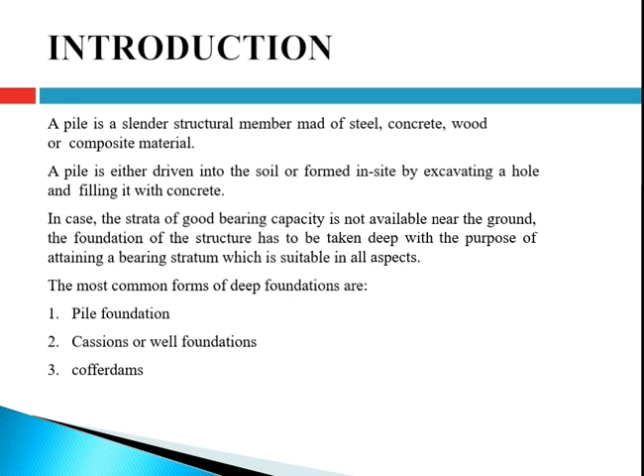with the concrete. In case a stratum of good bearing capacity is not available near the ground, the foundation of the structure has to be taken deep with the purpose of attaining a bearing stratum which is suitable in all aspects. The most common forms of deep foundations are pile foundation, caisson or well foundations, and cofferdams.

Next is uses of pile foundation. The load of the superstructure is heavy and its distribution is uneven. The topsoil has poor bearing capacity. The subsoil water is high so that pumping of water from the open trenches for the shallow foundation is difficult and uneconomical. There is large fluctuation in subsoil water level, where timbering to the trenches is difficult and costly.

The structure is situated on the seashore or riverbed, where there is danger of scouring action of water. Canal or deep drainage line exists near the foundation. The topsoil is of expansive nature. Piles are used for the foundation of transmission towers and offshore platforms, which are subjected to uplift forces.

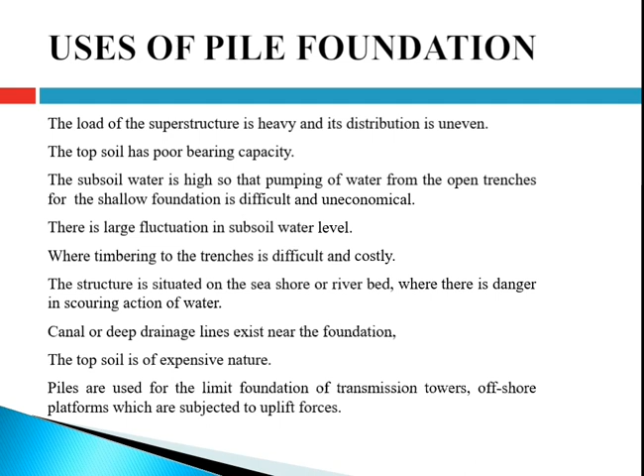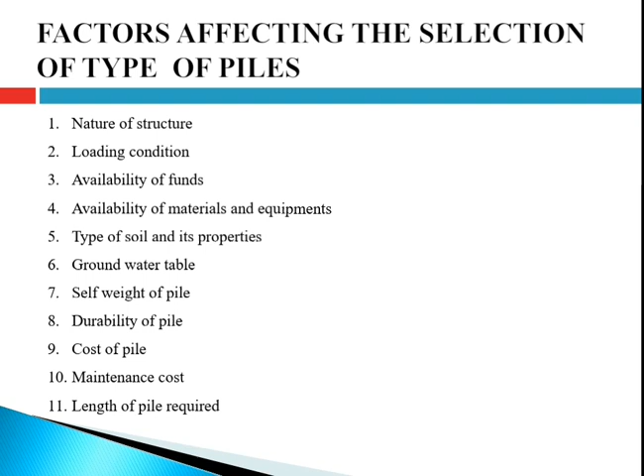Next is factors affecting the selection of type of piles. Nature of structure, loading condition, availability of funds, availability of material and equipment, type of soil and its properties, groundwater table, self weight of pile, durability of pile, cost of pile, maintenance cost, length of pile required, number of piles required, case study of adjacent building, facilities available for pile driving, difficulties in pile driving, adaptability to

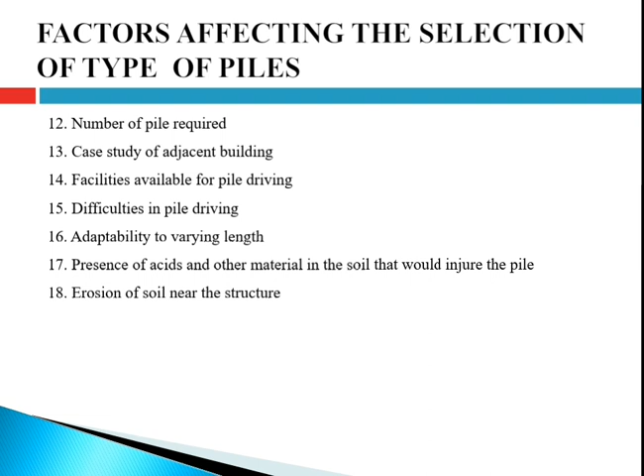varying length, presence of acids and other material in the soil that will injure the pile, and erosion of soil near the structure. So now we will discuss it in depth. First one is nature of structure. For structures on land, the driven and cast in place piles are usually the cheapest for moderate loadings and unhampered site conditions. For the foundation of wharf structures and jetties on the seashore, the driven piles or driven and cast in place piles are preferred.

In case piling is to be done very near to some existing structure, open-ended tube piles or H-piles may work out to be a good choice. Piles used to support marine structures or structures above open water should be precast type. The jacked piles are suitable for underpinning existing structures. For heavy structures, large diameter bored piles are the most economical type.

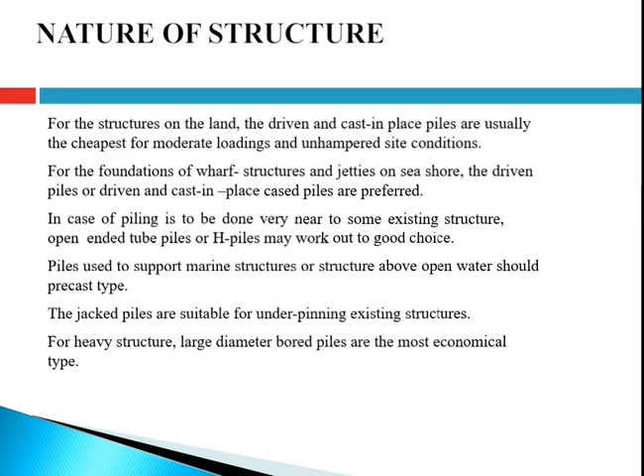Next one is ground condition. If the subsoil consists of silt or alluvium of appreciable depth, the pile will act as a friction pile. In case the ground is very weak or loose and it is intended to use cast in situ piles, casing will be required to prevent the inflow of soil into the pile hole. In adverse conditions where the groundwater flow is strong, piles with permanent casing should be used. Alternatively, precast piles may be used.

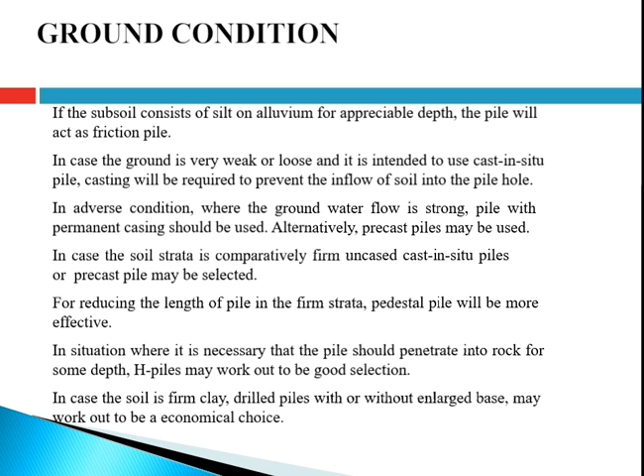In case the soil strata is comparatively firm, uncased cast in situ piles or precast piles may be selected. For reducing the length of the pile in the firm strata, pedestal piles will be more effective. In situations where it is necessary that the pile should penetrate into the rock for some depth, H piles may work out to be a good selection. In case the soil is firm clay, drilled piles with or without enlarged base may work out to be an economical choice.

Next one is durability. In situations where there is a possibility of the soil being chemically aggressive, high quality precast concrete piles should be selected. Timber piles may work out to be economical if they are used for the foundation of timber trestle structures with moderate load or if the piles are to be used for protecting concrete docks, etc. Timber piles are not suitable for marine conditions as they are likely to be affected by borers or insects.

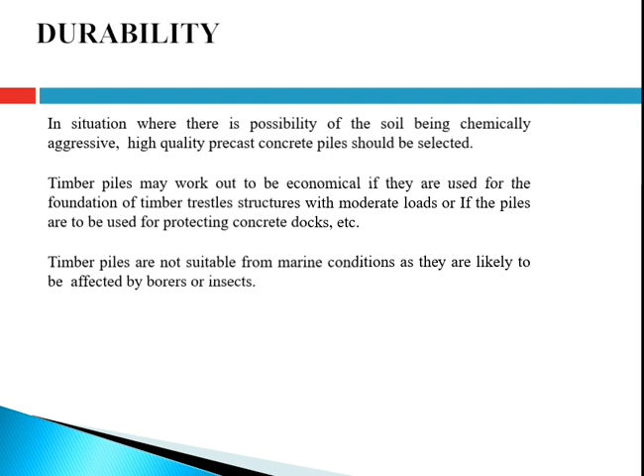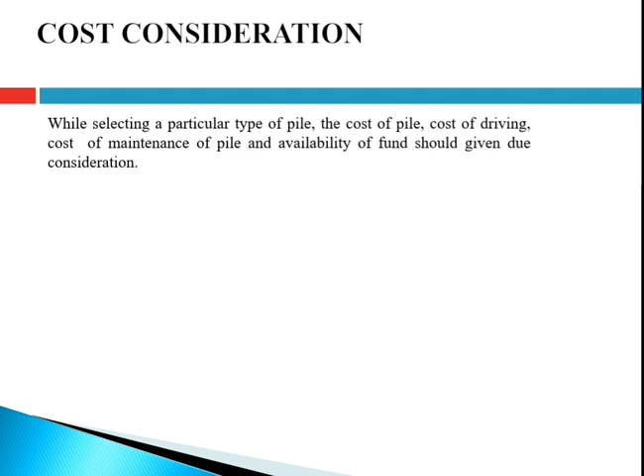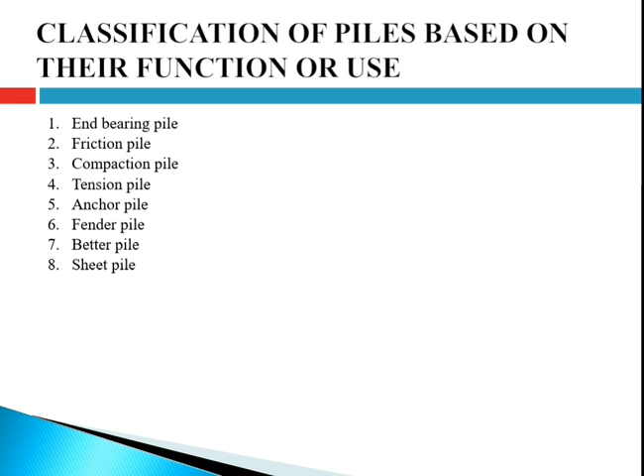Next is cost consideration. While selecting a particular type of pile, the cost of pile, cost of driving, cost of maintenance of pile and availability of funds should be given due consideration. Next is classification of piles based on their function or use, which are end-bearing pile, friction pile, compaction pile, tension pile, anchor pile, fender pile, batter pile and sheet pile.

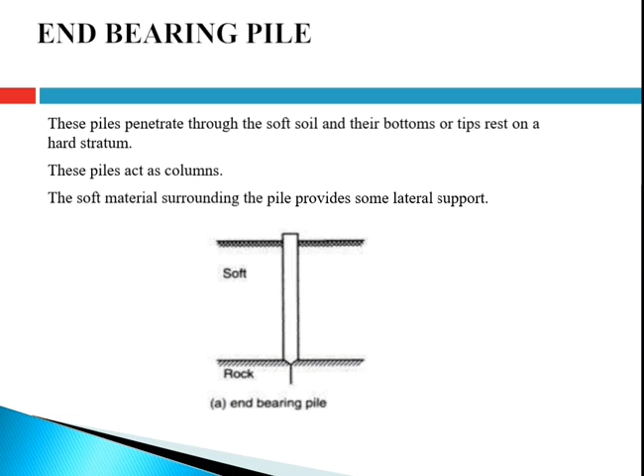Next one is friction pile, which you can see in the image. When loose soil extends to a great depth, piles are driven up to such a depth that frictional resistance developed at the sides of the piles equals the load coming on the piles. Friction piles are used when a hard stratum is available at greater depth.

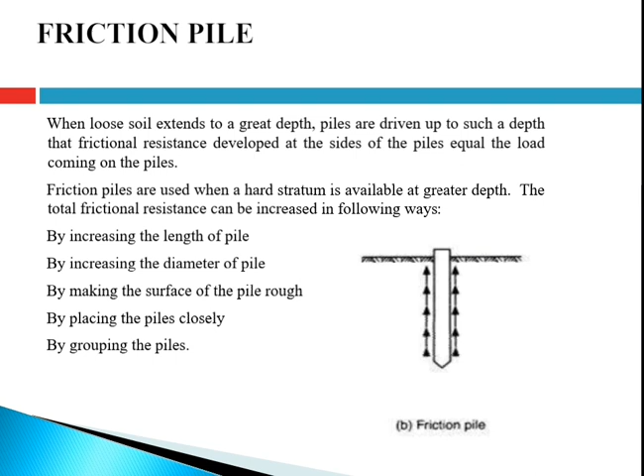The total frictional resistance can be increased in the following ways: by increasing the length of pile, by increasing the diameter of pile, by making the surface of the pile rough, by placing the piles closely, by grouping the piles.

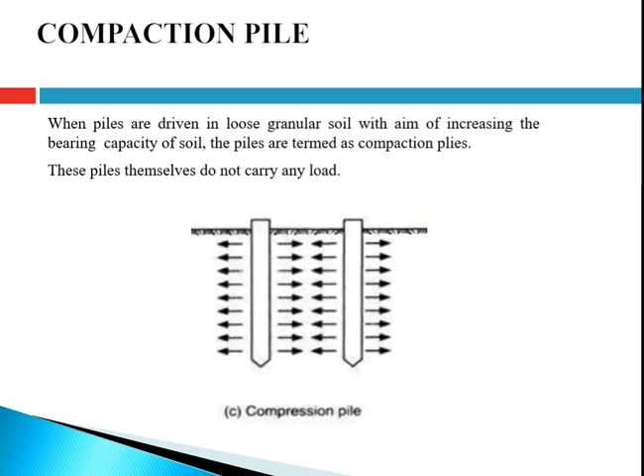Next one is compaction pile, which you can see in the image. When piles are driven in loose granular soil with the aim of increasing the bearing capacity of soil, the piles are termed as compaction piles. These piles themselves do not carry any load.

Next is tension pile. You can see it in the image where turning force and frictional force is shown. These piles anchor down the structure subjected to uplift due to hydrostatic pressure or due to overturning moment. It is also called uplift pile.

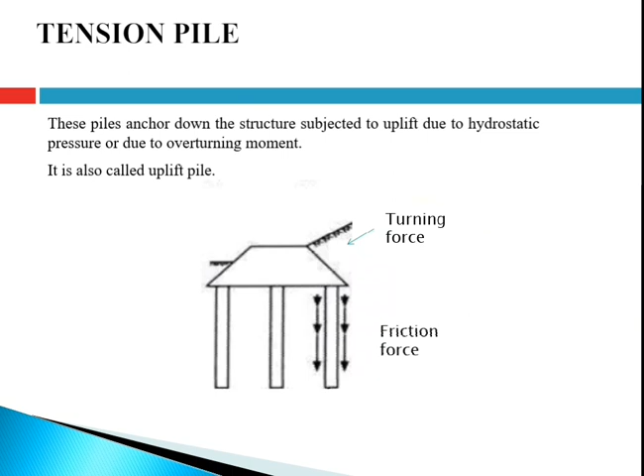Next one is anchor pile, fender pile, batter pile and sheet pile, which you can see in the image. All the piles are shown. So moving towards it, anchor piles provide anchorage against the horizontal pull from sheet piling or other pulling force. Fender piles are used to protect waterfront structures against impact from ships or other floating objects.

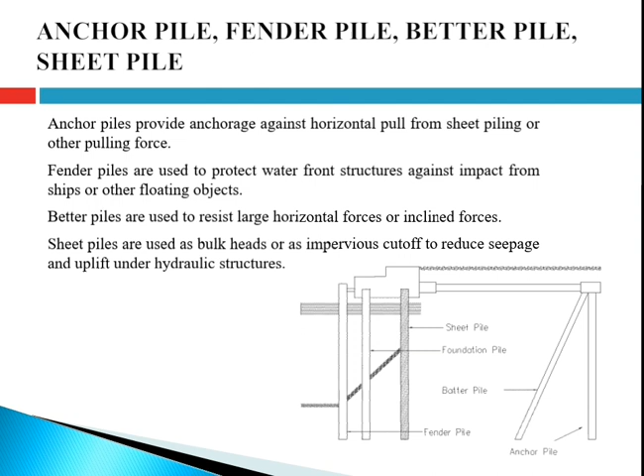Batter piles are used to resist large horizontal forces or inclined forces. Sheet piles are used as bulkheads or as impervious cutoff to reduce seepage and uplift under hydraulic structures.

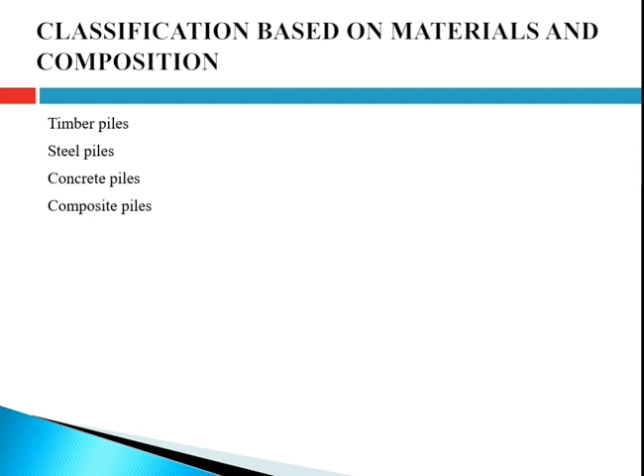Next, classification based on materials and composition, which are mainly timber piles, steel piles, concrete piles and composite piles. So here you can see timber pile in the image. So moving forward to it, timber piles are made of tree trunks driven with the small end as a point. They may be circular or square.

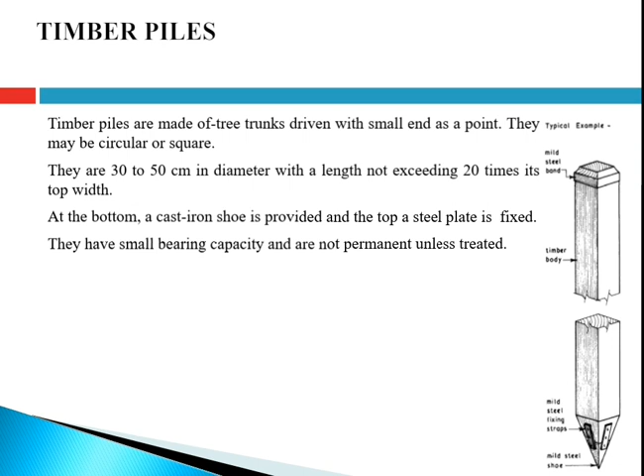They are 30 to 50 cm in diameter with a length not exceeding 20 times its top width. At the bottom, a cast iron shoe is provided and atop a steel plate is fixed. They have small bearing capacity and are not permanent unless treated.

Next, timber pile advantages. Economical where timber is easily available, can be driven rapidly and as such saves time. Because of elasticity, timber piles are recommended for sites subjected to unusual lateral forces, for example, a ship or ferry terminal. They do not need heavy machinery and elaborate technical supervision. Being light, they can be easily handled. They can be easily withdrawn if needed.

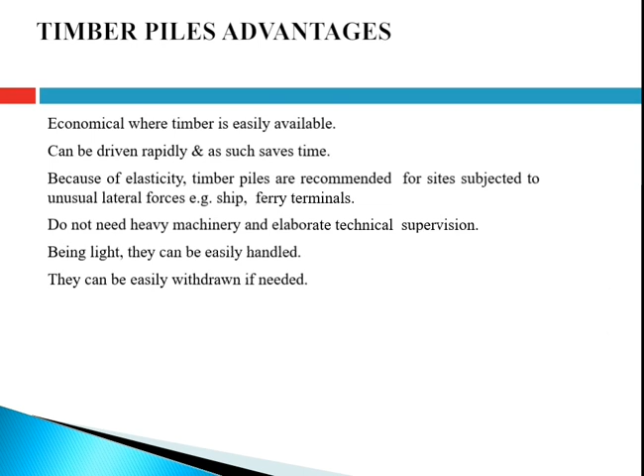Next, disadvantages. These piles cannot take heavy load and are unsuitable for use as end-bearing piles, liable to decay or deteriorate by salt water or insects. Restricted length, and it is rather difficult to procure piles in required size and length. It is difficult or rather impossible to drive these piles into the hard stratum.

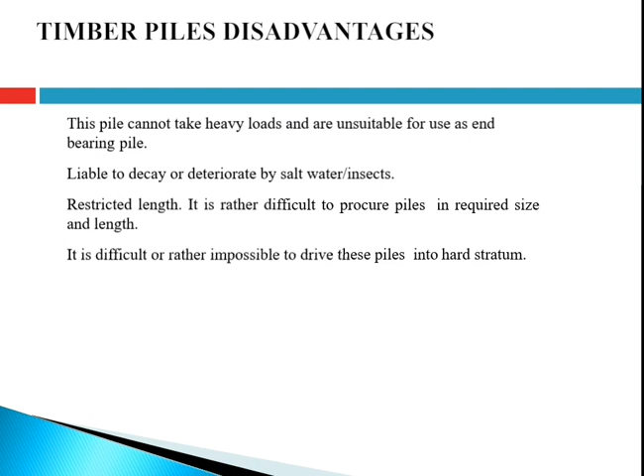So next one is steel piles. You can see rolled steel piles and H steel pile in the image. So moving towards it, steel piles are usually of rolled H section or thick pipe section. These piles are used to withstand large impact stresses and where less disturbance from driving is desired. Steel sheet piles and H piles are generally used to support the open excavation and to provide seepage barrier.

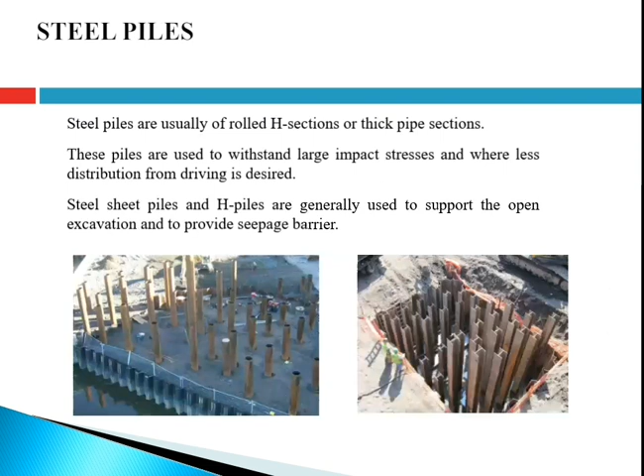Next one is concrete pile. You can see it in the image. Concrete piles are either precast or cast in situ. Precast piles are cast and cured at the casting site and then transported to the site for installation. These piles are adequately reinforced to withstand handling stresses along with working stresses. Precast piles are normally suitable for short lengths.

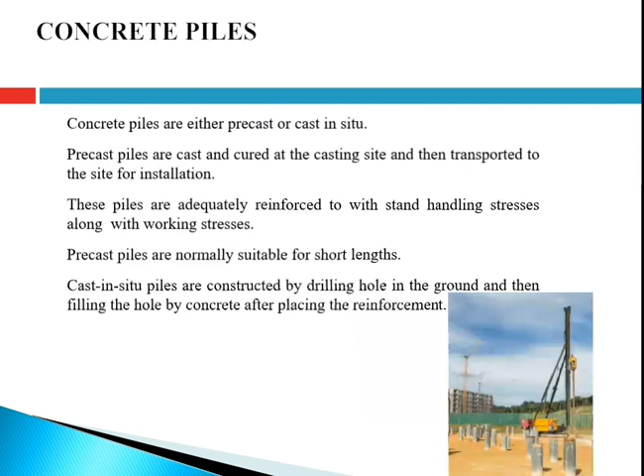So precast piles are those which are manufactured in a factory or at a place away from the construction site and then driven into the ground at the place required. These piles require heavy pile driving machinery. Precast piles may be square, octagonal or circular in cross section and may be tapered or parallel sided longitudinally.

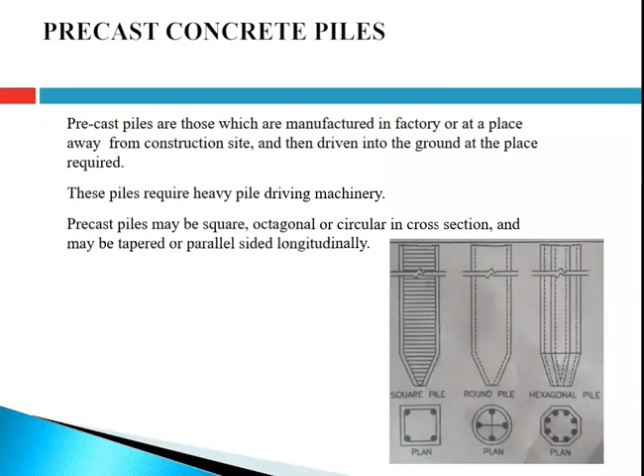The size of pile may vary from 30 cm to 50 cm in cross sectional dimension and up to 20 m or more in length. The reinforcement may consist of longitudinal steel bars of 20 mm to 40 mm in diameter, 4 to 8 nos, with ties of 6 to 10 mm diameter at 100 mm center to center spacing for the top and bottom 1 m length and 300 mm center to center spacing for the middle length. A concrete cover of at least 50 mm is provided and the grade of concrete should be M20.

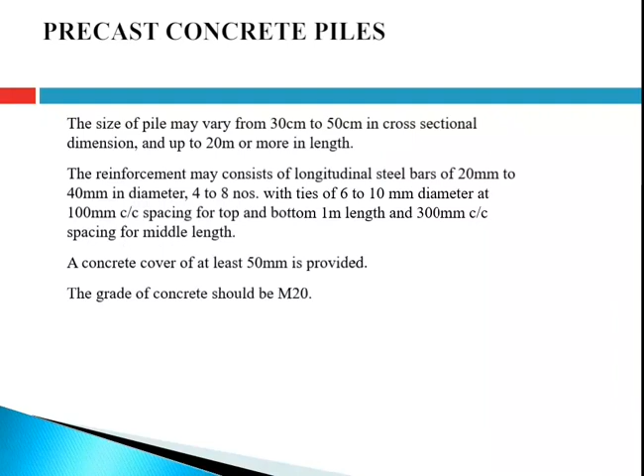Next one is the procedure for forming precast concrete piles. The formwork for the piles is prepared and it is coated with soap solution or oil to prevent adhesion. The cage of reinforcement is prepared as per design, and this cage is then placed in the formwork. A concrete cover of at least 50 mm is provided.

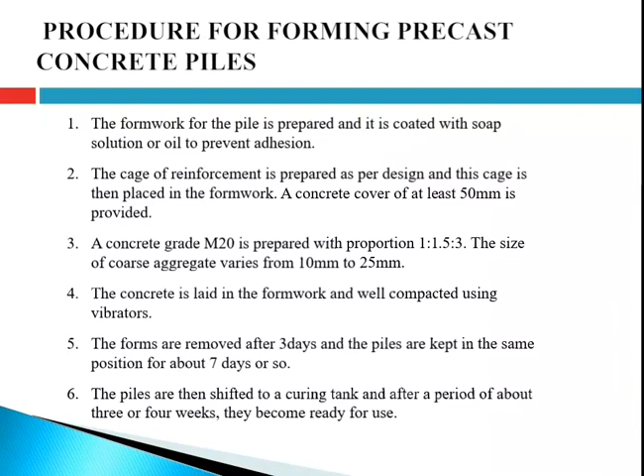A concrete of grade M20 is prepared with proportion 1:1.5:3. The size of coarse aggregate varies from 10 mm to 25 mm. The concrete is laid in the formwork and well compacted using vibrators. The forms are removed after 3 days and the piles are kept in the same position for about 7 days or so. The piles are then shifted to a curing tank and after a period of about 3 or 4 weeks they become ready for use.

Next, advantages of precast concrete piles. They can be cast well before the commencement of the work, resulting in rapid execution of work. The position of reinforcement in the pile is not disturbed from its original position. They can be driven under water. The piles can be loaded soon after they have been driven to a desired depth. Any number of piles can be manufactured at a convenient place and this may prove to be economical. These piles are highly resistant to biological and chemical action of the subsoil.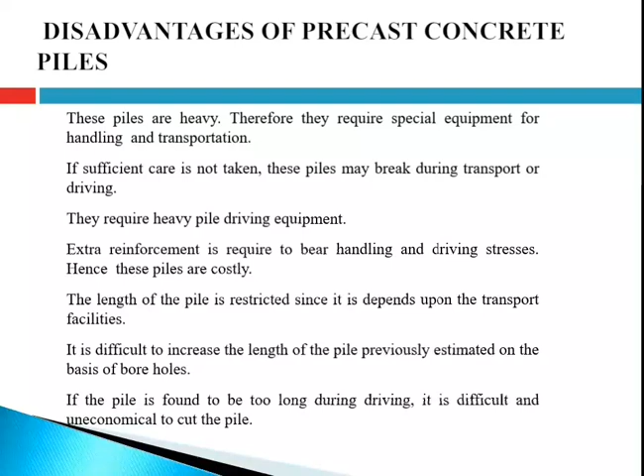The length of the pile is restricted since it is dependent upon the transportation facility. It is difficult to increase the length of the pile previously estimated on the basis of boreholes. If the pile is found to be too long during driving, it is difficult and uneconomical to cut the pile.

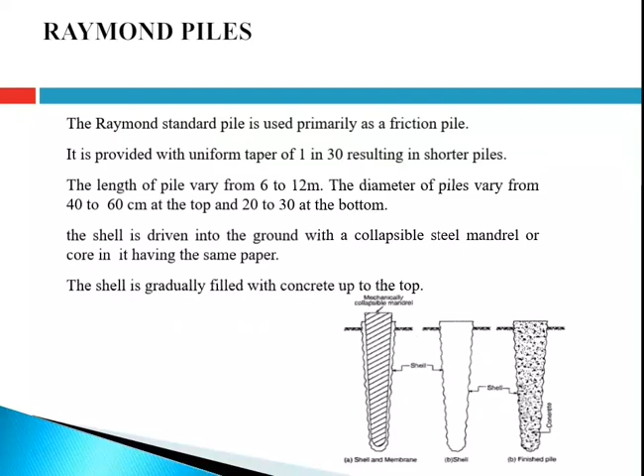Next one is Raymond piles. The Raymond standard pile is used primarily as a frictional pile. It is provided with a uniform taper of 1:30, resulting in shorter piles. The length of piles varies from 6 to 12 meters. The diameter of piles varies from 40 to 60 cm at the top and 20 to 30 cm at the bottom. The shell is driven into the ground with a collapsible steel mandrel or core in it having the same taper. The shell is gradually filled with concrete up to the top. So here you can see the whole process in the image.

Next one is MacArthur piles. MacArthur is a pile of uniform diameter using a corrugated steel shell which remains in place as in Raymond piles. A heavy steel casing with a core is driven into the ground. When the desired depth is reached, the core is withdrawn and a corrugated steel shell is placed in the casing. Concrete is placed in the shell by gradually compacting it and withdrawing the steel casing. So here you can see all the stages in the image.

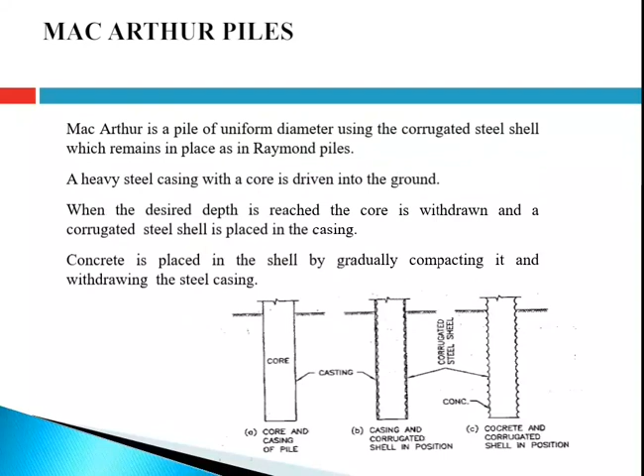Next, BSP base driven piles. You can see it in the image. This pile consists of a helically welded shell of steel plate. A concrete plug is provided at the bottom of the shell. Driving is done by allowing the pile hammer to fall on the concrete plug. The casing is driven to the desired depth and then it is filled with concrete.

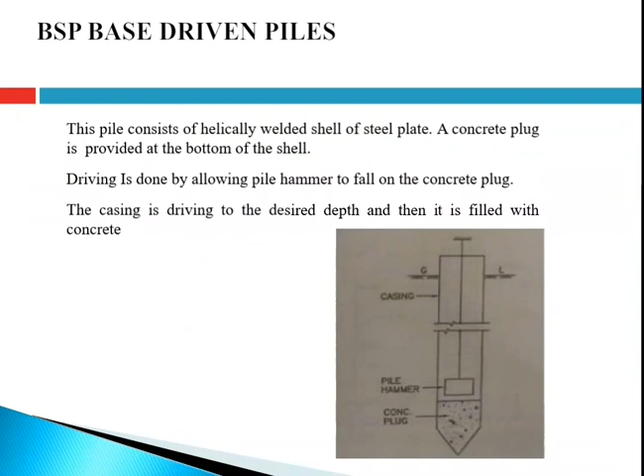Next is swage piles. Swage piles are used with advantage in some soils where the driving is very hard or where it is desired to leave a watertight shell for some time before filling the concrete. In the first stage, a steel shell is placed on the precast concrete plug and a steel core which is not long enough to reach the plug is inserted. In the second stage, the pipe is driven over the plug until the core reaches the plug. The pipe is swaged out by the taper of the plug, thus forming a watertight joint.

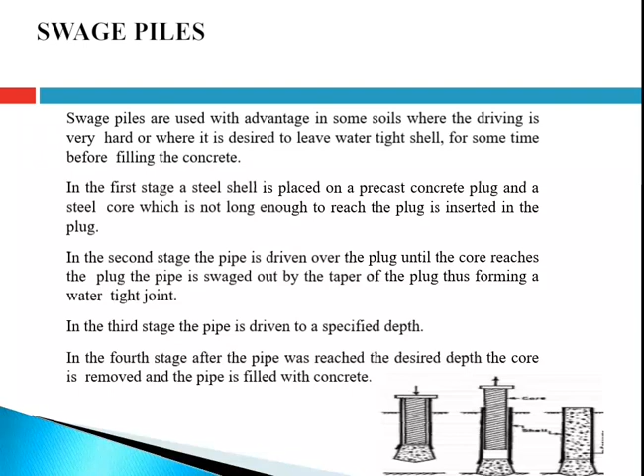In the third stage, the pipe is driven to a specified depth. In the fourth stage, after the pipe has reached the desired depth, the core is removed and the pipe is filled with concrete.

Next one is button bottom piles. These piles are used in locations where an increase in the end bearing area is desired. The piles use a concrete plug in the shape of a button. These piles have been used up to lengths of about 23 meters and for loads up to 50 tons. In the first stage, a steel pipe with a 12 mm thick wall is set on the concrete button. The concrete button has a diameter about 25 mm larger than the pipe.

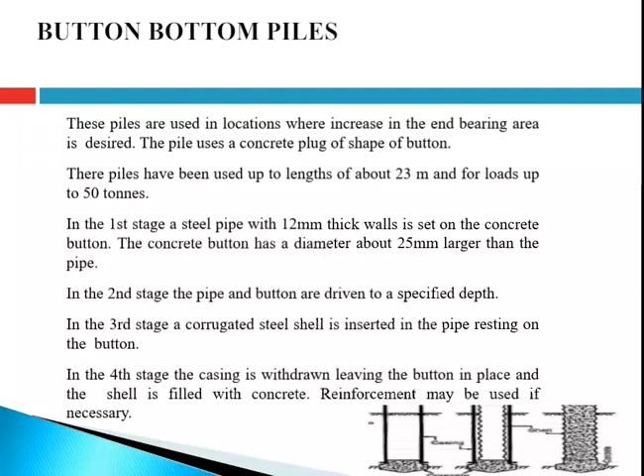In the second stage, the pipe and button are driven to a specified depth. In the third stage, a corrugated steel shell is inserted in the pipe resting on the button. In the fourth stage, the casing is withdrawn, leaving the button in place, and the shell is filled with concrete, and reinforcement may be used if necessary.

Next, uncased cast in situ concrete piles. Advantages and disadvantages. So moving towards the advantages, these piles are cheap as no casing will be left in the ground. Special handling equipment is not required. Concrete is not liable to damage from driving. Cutting of excess length is not required. Storage space not required. Disadvantages are: great skill is required.

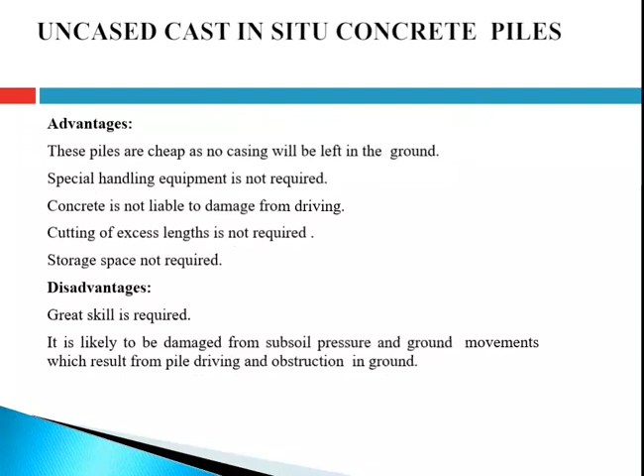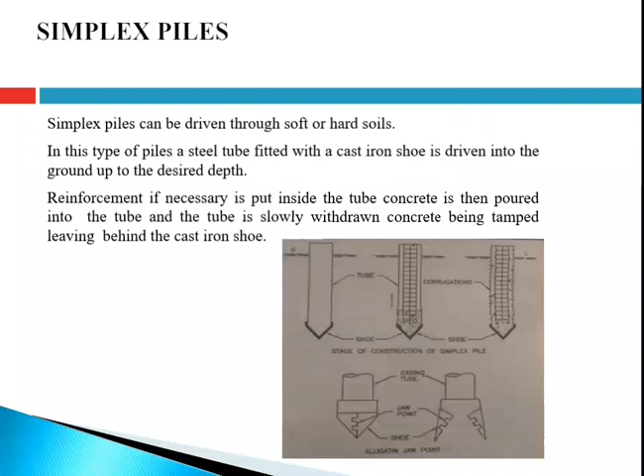In this type of piles, a steel tube fitted with a cast iron shoe is driven into the ground up to the desired depth. Reinforcement, if necessary, is put inside the tube. Concrete is then poured into the tube and the tube is slowly withdrawn, concrete being tamped, leaving behind the cast iron shoe.

In the next stage, the shaft is formed by introducing successive charges of concrete, ramming each in turn and withdrawing the casing gradually about 300 mm at a time. The pile diameter in Franki piles may vary from 50 cm to 60 cm, while the enlarged base may have a diameter of about 90 cm. The pile has a load carrying capacity of 60 to 90 tons.

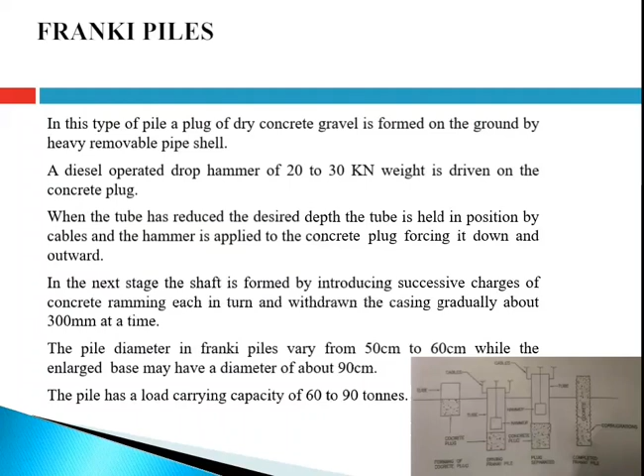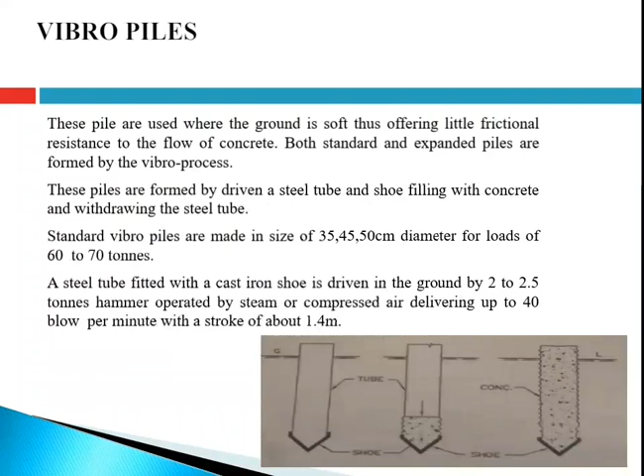Standard vibro piles are made in size of 35, 45 and 50 cm diameter for loads of 60 to 70 tons. A steel tube fitted with the cast iron shoe is driven into the ground by 2 to 2.5 tons hammer operated by steam or compressed air, delivering up to 40 blows per minute with a stroke of about 1.4 meter.

This core is again placed in the casing to rest on the poured concrete. Pressure is applied on the concrete through the core, and at the same time the casing is withdrawn. The process is repeated till the casing is completely removed.

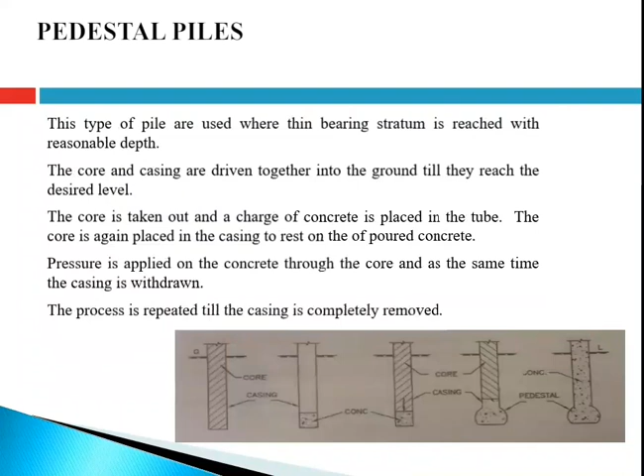When the tube reaches the required depth, the boring tool is withdrawn. In the second stage, a layer of concrete is laid and pressure cap is provided at the top of the tube. The process is repeated till the pile is completed.

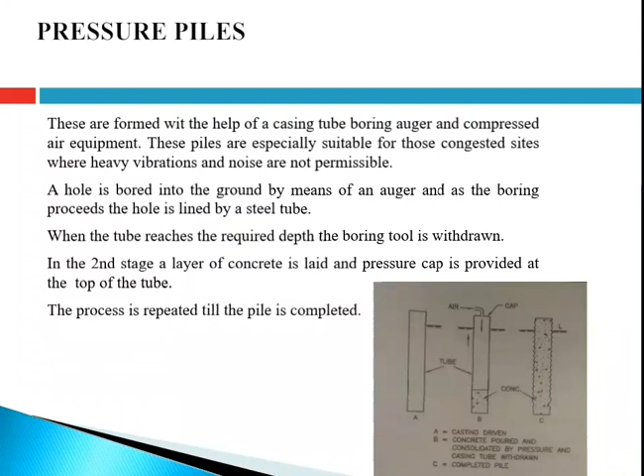Next one is under-reamed piles. These piles are developed by CBRI Roorkee in UP for serving as a foundation for black cotton soil, filled up ground and other types of soil having poor bearing capacity. An under-reamed pile is a bored cast in situ concrete pile having one or more bulbs or under-reams in its lower portion. The bulbs or under-reams are formed by under-reaming tool.

The diameter of the under-reamed piles varies from 20 cm to 50 cm, and that of bulb varies from 2 to 3 times the diameter of pile. The length of under-reamed piles is about 3 meter to 8 meter. The spacing of pile may vary from 2 meter to 4 meter. The under-reamed piles can also be used for sandy soil with high water table.

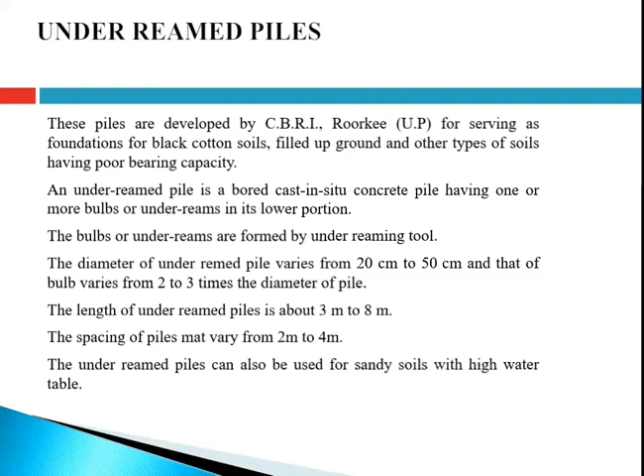The load carrying capacity of under-reamed piles can be increased by adopting piles of larger diameter, or by extending the length of the piles, or by making more bulbs at the base. A single under-reamed pile has only one bulb at the bottom. When two or more bulbs are provided at the base, it is known as multi-bulb under-reamed pile.

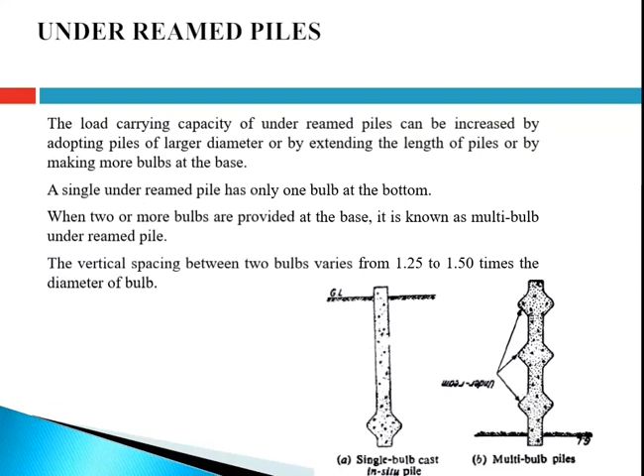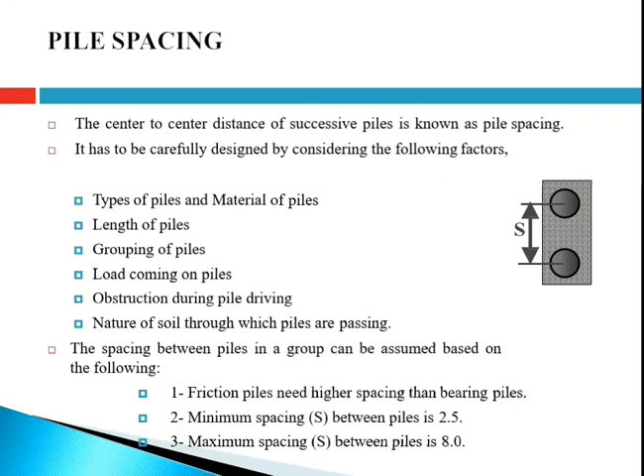First, frictional piles need higher spacing than bearing piles. Second, minimum spacing between piles is 2.5 and maximum spacing between piles is 8.0. So here you can see different arrangements of piles according to pile spacing and the number of piles. 2 to 7 pile spacings are shown in the image.

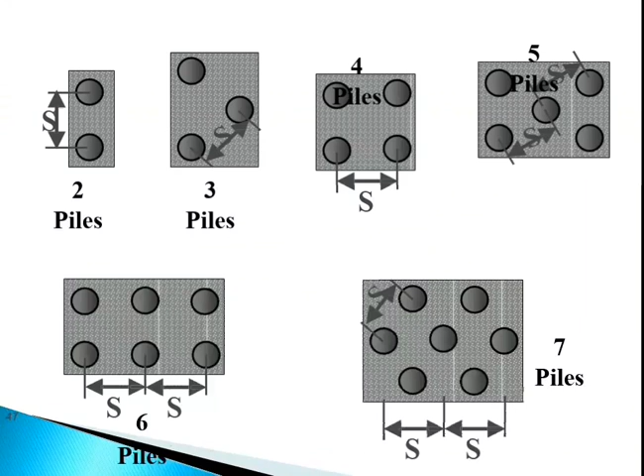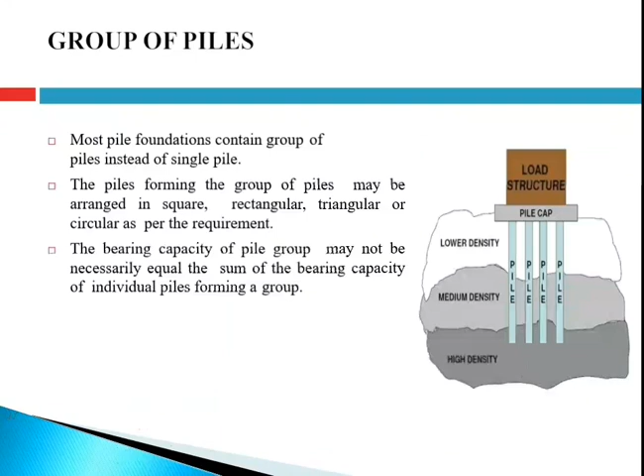Next, group of piles. Most pile foundations contain a group of piles instead of a single pile. The piles forming the group may be arranged in square, rectangular, triangular or circular patterns as per the requirement. The bearing capacity of a pile group may not necessarily equal the sum of the bearing capacities of the individual piles forming the group, which you can see in the image.

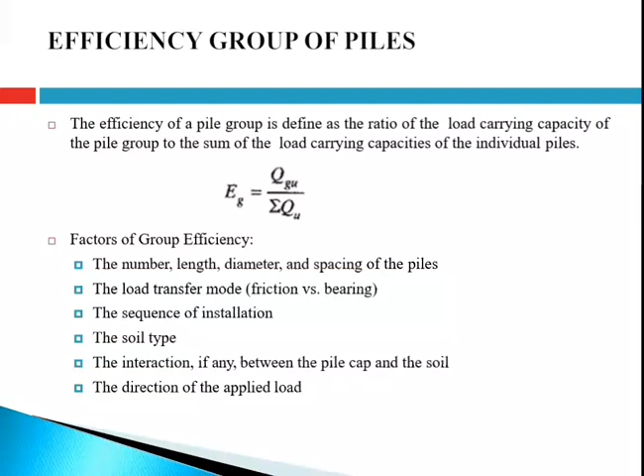Next, efficiency of group of piles. The efficiency of a pile group is defined as the ratio of the load carrying capacity of the pile group to the sum of the load carrying capacities of the individual piles, which is given by E_G = Q_GU / ΣQ_U. Factors of group efficiency: the number, length, diameter and spacing of the piles, the load transfer mode, whether it is frictional versus bearing, the sequence of installation, the soil type, the interaction if any between the pile cap and the soil, and the direction of the applied load.

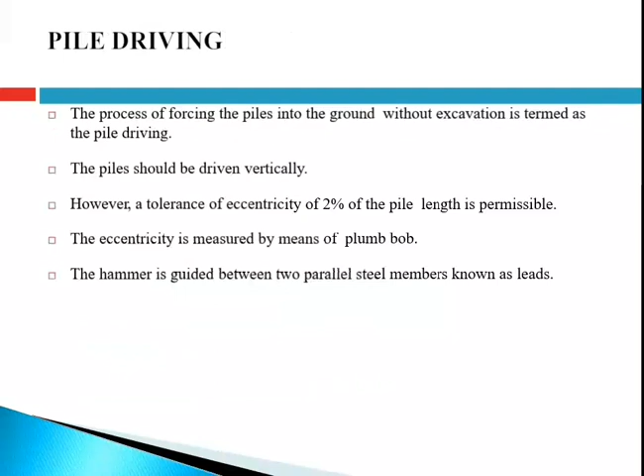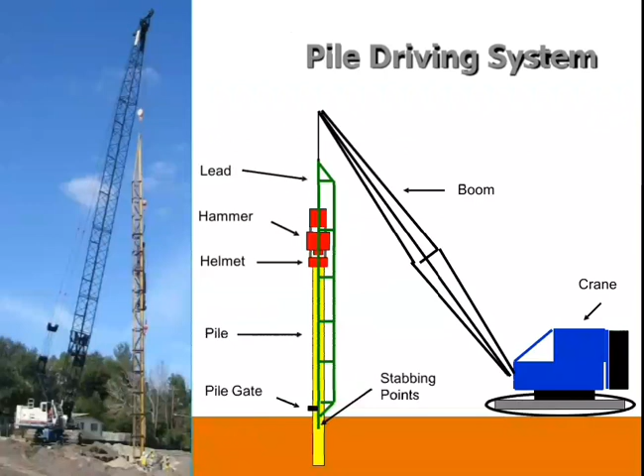Next one is pile driving. The process of forcing the pile into the ground without excavation is termed pile driving. The pile should be driven vertically. However, a tolerance of eccentricity of 2% of the pile length is permissible. The eccentricity is measured by means of a plumb bob. The hammer is guided between two parallel steel members known as leads. So here you can see a pile driving system schematic diagram and also a real life image of it with all the components.

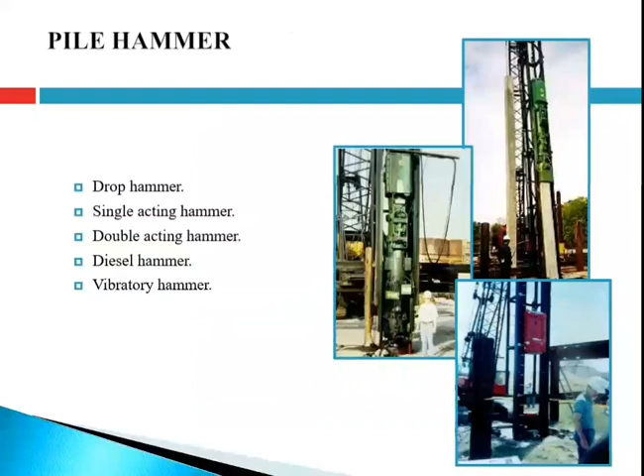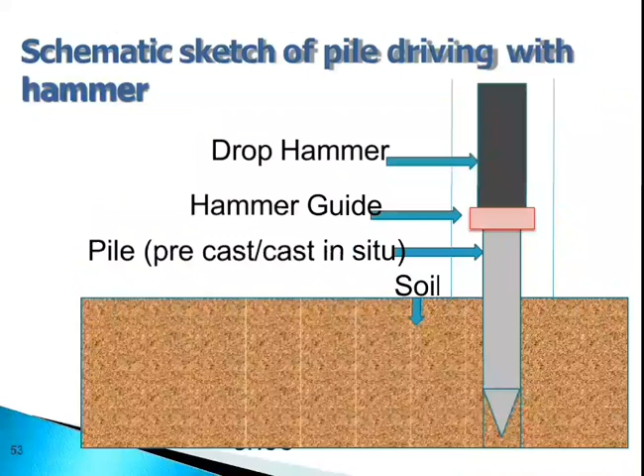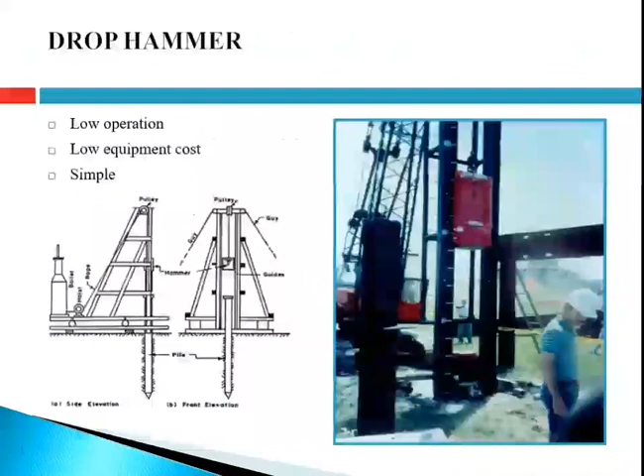Next, drop hammer. They have low operation and equipment cost and are simple in construction. You can see it in the diagram and real life image. A hammer, also known as a ram or monkey, is raised by a winch and allowed to fall or drop by gravity on the top of the pile. The drop hammer is provided with lugs so that it can slide in the leads. A lifting eye or hook is provided to tie it with the rope.

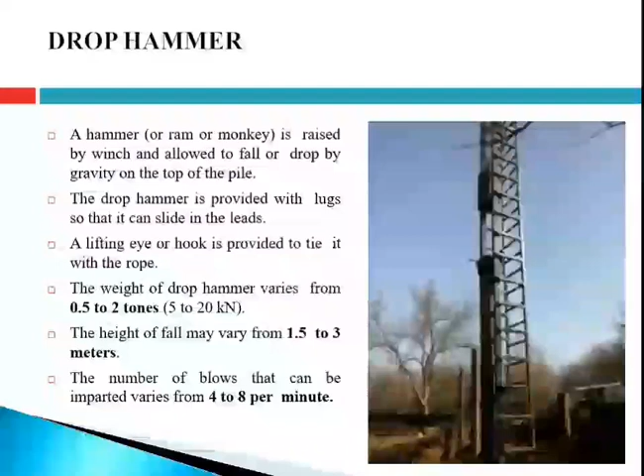The weight of a drop hammer varies from 0.5 to 2 tons. The height of fall may vary from 1.5 to 3 meters. The number of blows that can be imparted varies from 4 to 8 per minute. You can see the drop hammer in the image.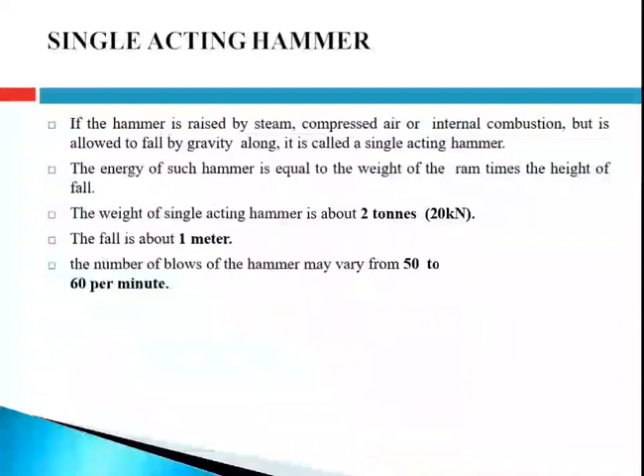Next one is single acting hammer. If the hammer is raised by steam, compressed air or internal combustion, but it is allowed to fall by gravity alone, it is called a single acting hammer. The energy of such a hammer is equal to the weight of the ram times the height of fall. The weight of a single acting hammer is about 2 tons. The fall is about 1 meter. The number of blows may vary from 50 to 60 per minute. So here you can see a schematic diagram and real life image of a single acting hammer.

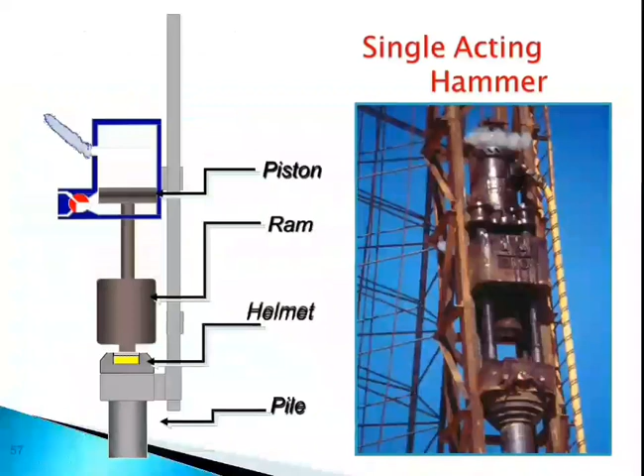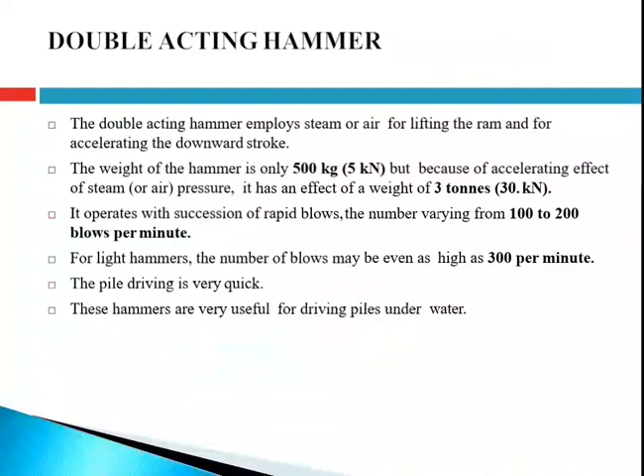Next one is double acting hammer. The double acting hammer employs steam or air for lifting the ram and for accelerating the downward stroke. The weight of the hammer is only 500 kg, but because of the accelerating effect of steam or air pressure, it has the effect of a weight of 3 tons. It operates in rapid succession, the number varying from 100 to 200 blows per minute. For light hammers, the number of blows may be as high as 300 per minute. The pile driving is very quick. These hammers are very useful for driving piles under water. So here you can see the double acting hammer.

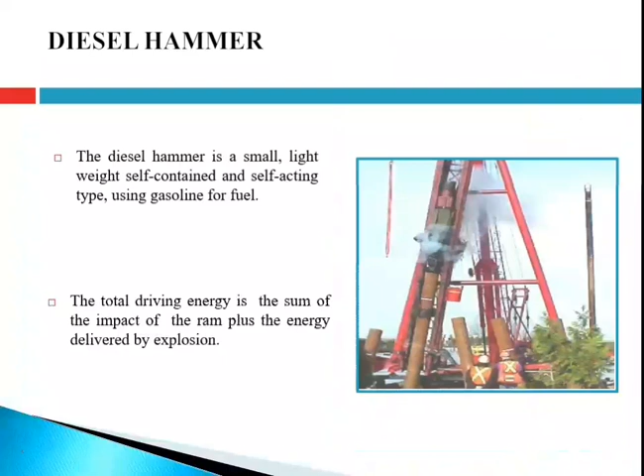Next one is diesel hammer. You can see it in the image. The diesel hammer is a small, lightweight, self-contained and self-acting type using gasoline for fuel. The total driving energy is the sum of the impact of the ram plus the energy delivered by the explosion.

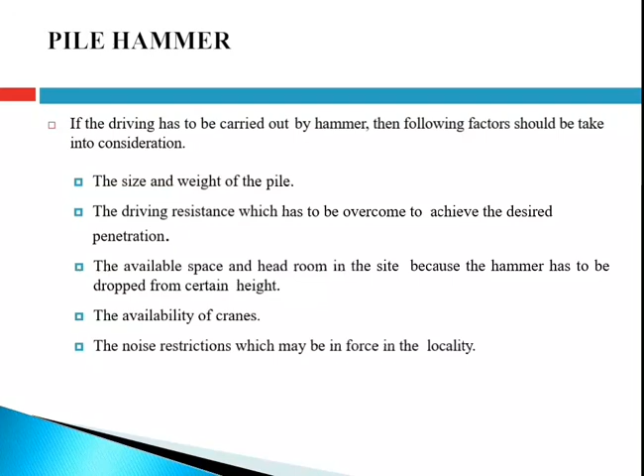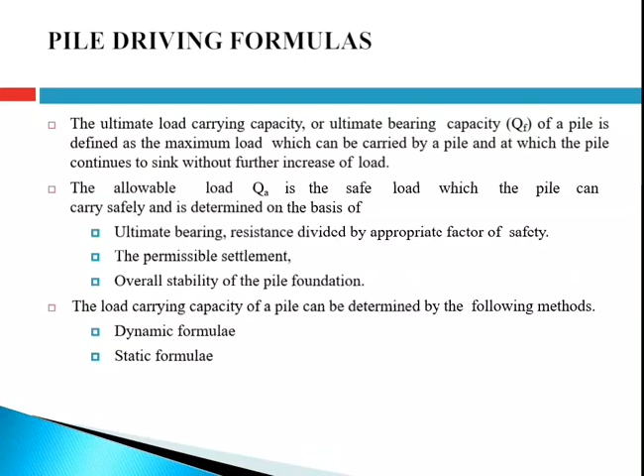Next one is pile driving formulas. The ultimate load carrying capacity or ultimate bearing capacity, denoted by QF, of a pile is defined as the maximum load which can be carried by a pile and at which the pile continues to sink without further increase of load. The allowable load QA is the safe load which the pile can carry safely, determined on the basis of ultimate bearing resistance divided by an appropriate factor of safety, the permissible settlement, and overall stability of the pile foundation. The load carrying capacity of a pile can be determined by methods like the dynamic formula and static formula.